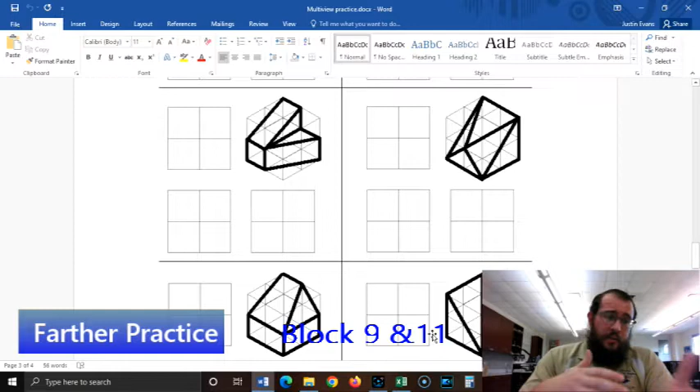Today I'm going to try to do block 9 and block 11. I'm going to do a combination of additive and subtractive for the first one here. So we've got these two triangles back to back like this, or 90 degrees to each other. This one I've been thinking on for a while, but I think I found a shortcut to do it quickly, so let me show you what I'm thinking.

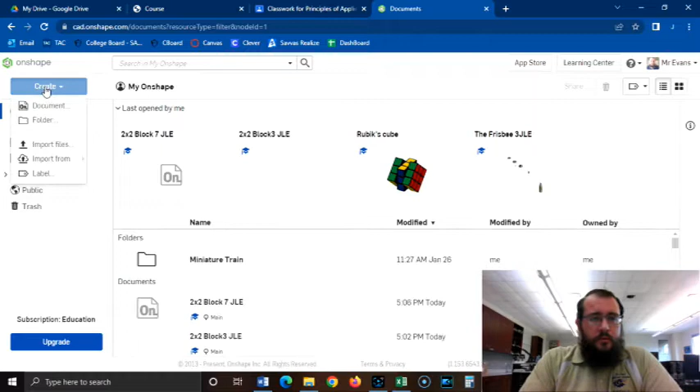Let me switch over to Onshape and start a new part. Actually, I'm going to do these in the same 2 by 2 block: 9 and 12, and then my initials. I'm going to put these all in the same piece, and I'll show you.

So from here, I'm basically going to extrude an L shape, and then I'm going to come back and cut out the triangles. There's a couple of different ways you could approach this. You could extrude a big 2 by 2 block and then start cutting pieces out, but that would take you 1, 2, 3, 4 steps.

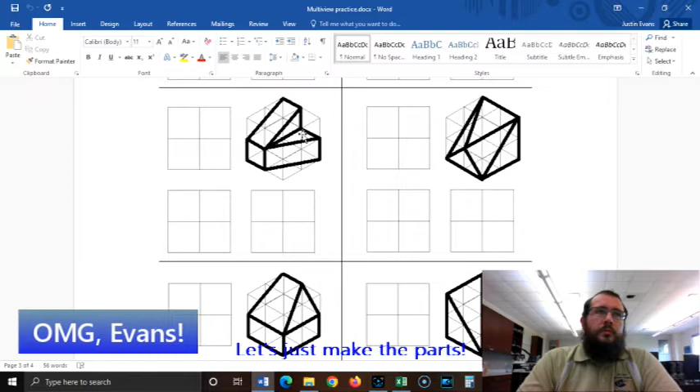I think this might be one of the fastest methods that I'll show you. All right, let's get to it.

So I'm going to click Sketch, and I'm going to sketch from the front view. I'm going to use the line tool now. Before I've been using blocks, so let me use the line tool instead, and I'm just going to make an L shape.

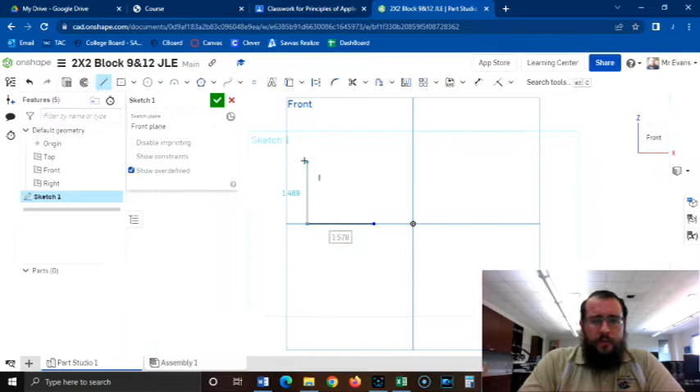And I'm very much ignoring those numbers. I drew that really badly, so let me come and fix some of that. I want to make sure that this is perpendicular, because this looks not straight at all, it looks crooked. So I'm going to make that perpendicular. If yours is, then you don't have to worry about it. Mine wasn't.

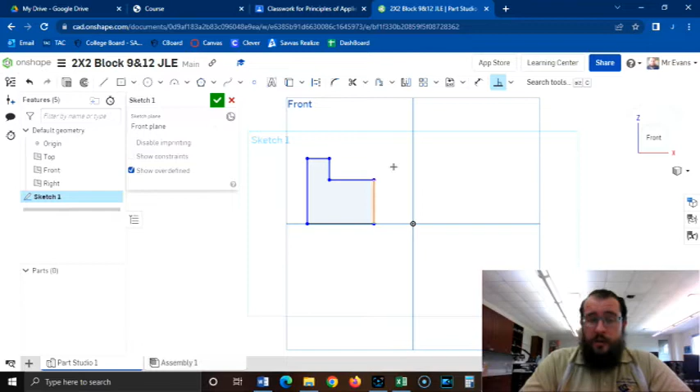Now let me add some dimensions. I want this to be 2 inches, and I think I would like it to be 2 inches from there. I want it to be 2 inches tall, and I want this to be 1 inch tall, and this to be 1 inch.

Now I don't have to dimension every single line. If you notice, they're all black, which means none of them can move. I could add a dimension here, but it's going to tell me it already knew that, and it'll make it gray, because it's saying if this is 2 inches, and I know these are 90 degrees, and that's 1 inch, then this one has to be 1. So it's going to kind of ignore that. When everything's black, that means nothing can be moved around.

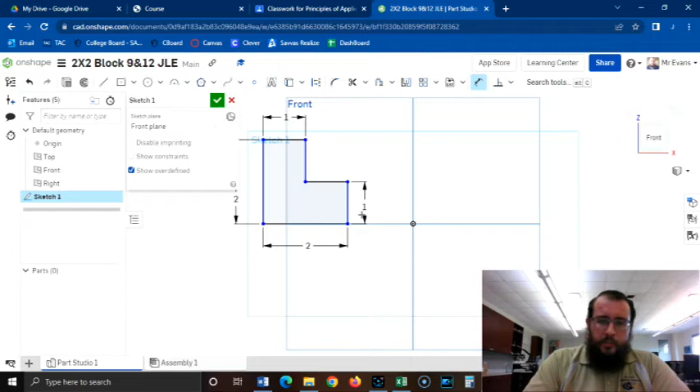It doesn't have to always be black. For instance, if I deleted this, some of them will turn blue because it can still shift around, which is why I put this dimension, just to kind of keep it in place. That dimension is called a location dimension - these others are all sizing dimensions. This one I'm just locating somewhere.

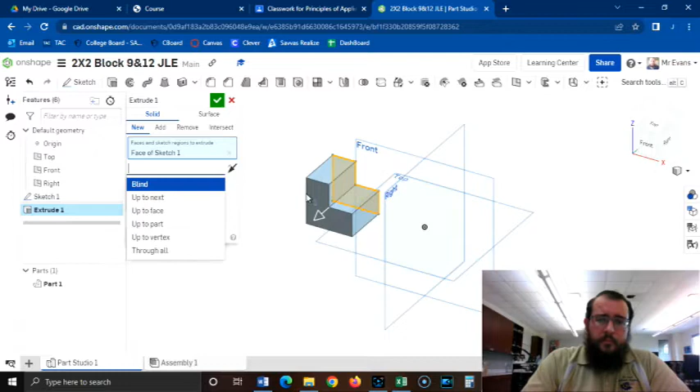So let me hit the green check mark, and we're going to extrude that. Let me show you a new part on the extrude tool. I want it to be 2 inches, but I prefer that my stuff be balanced, so I'm actually going to try and make it symmetric, so it splits 1 inch and 1 inch both ways.

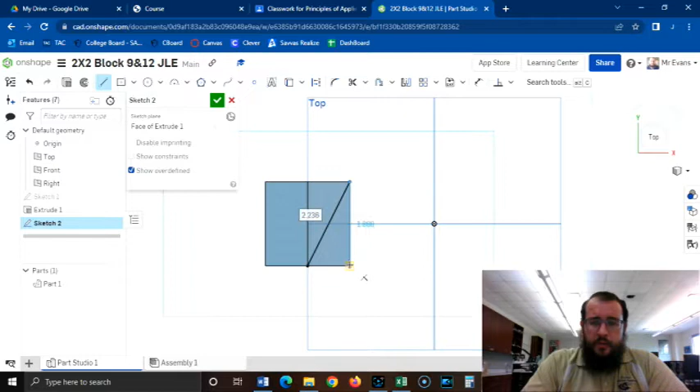All right, so now I've got my basic shape, and then I'm going to come in here and cut 2 triangles. So I'm going to start by putting a sketch on this surface and look at it from the top. I want to cut away this portion here. I don't think I need any dimensions because it's all just corners. Oops, not sketch, sorry - and then I'm going to extrude that. I might need to zoom in.

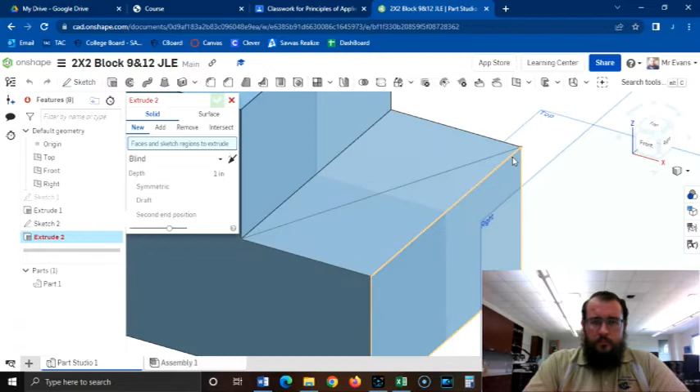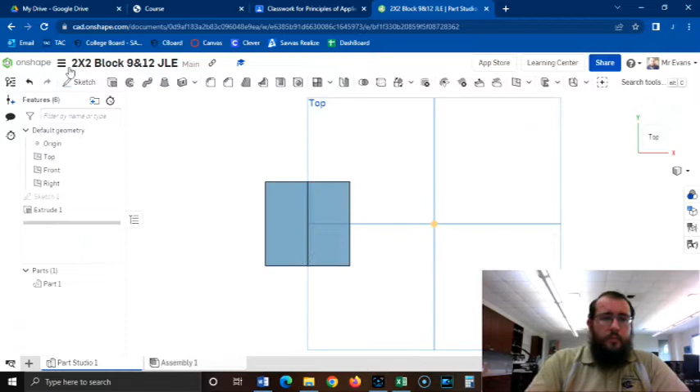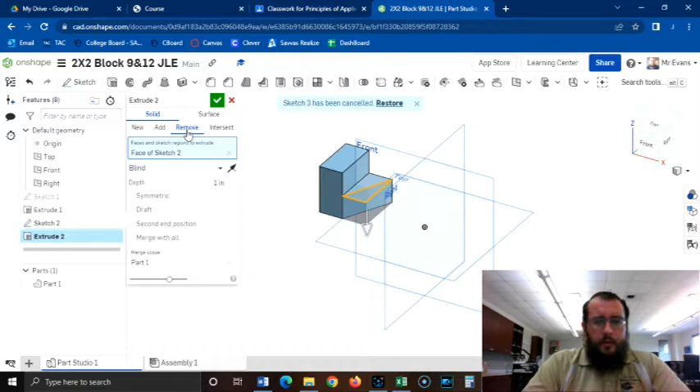Let's see, it's having some problems picking it up. Let me delete the sketch and try one more. Let's just draw the line and see if that helps it recognize. There we go, that helped. I think it got that. No, there we go. All right, I want it to remove. There we go, go down. There we go.

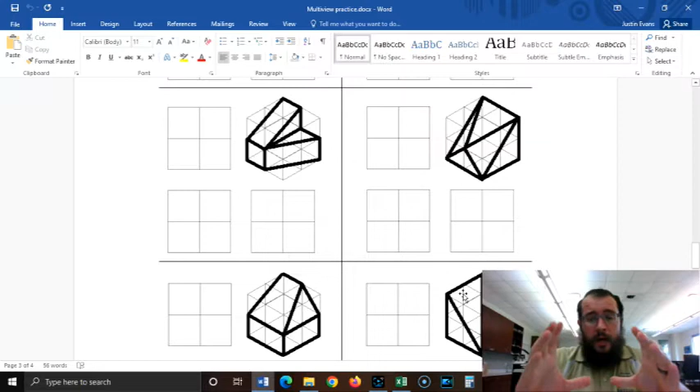Now let's move on to part 12. You could look at this as one big box and then somehow you're gonna have to cut in, and that would be a little bit complicated but not impossible. But we could also see this as just bringing in two triangle prisms with each other.

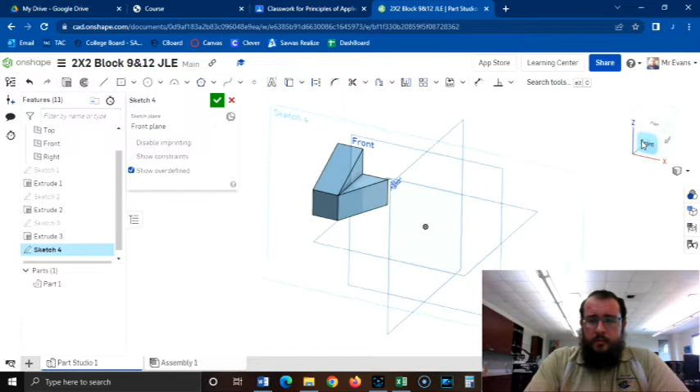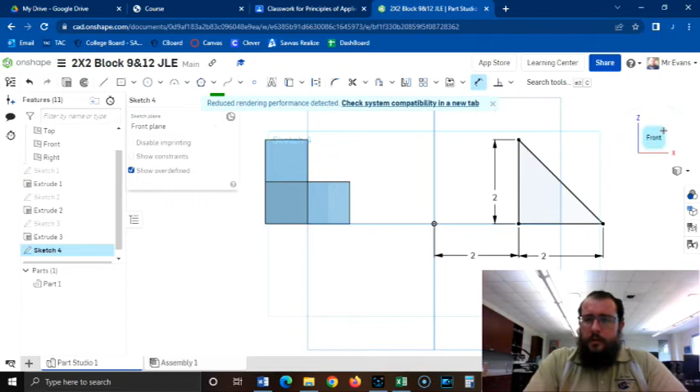So I'm going to put a sketch right here, and I'm going to draw one triangle. And you know what, I wasn't really paying attention to numbers, so I better add them in now. So I want to keep the same 2 inches away and 2 inches by 2 inches. Okay, and then we will extrude that.

And I would like to make it symmetric again, but 2 inches. There we go. And I'm going to hit OK on that. And then I want to send it in this way. But to do that, I think I'm going to have to do a new plane.

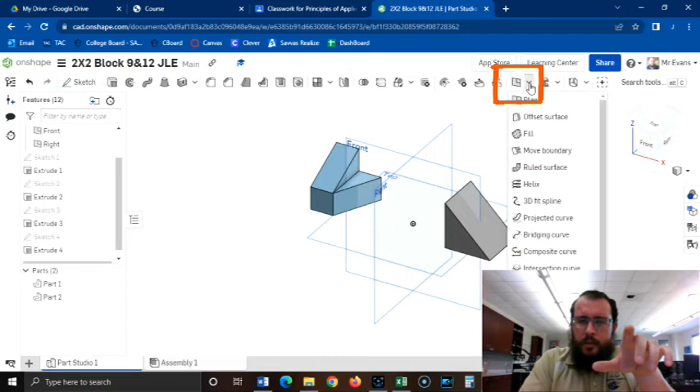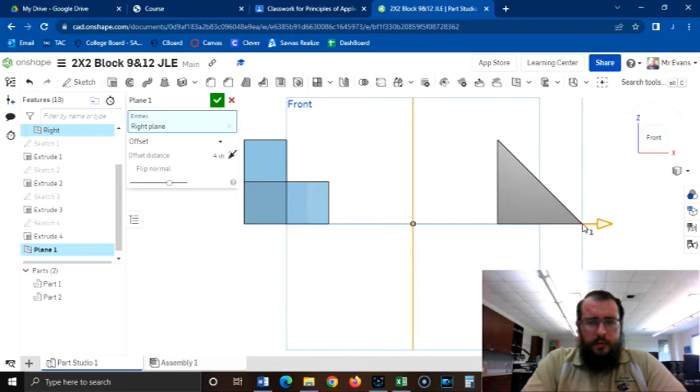So I'm going to click plane, offset. Let's see here, just plane. I'm going to click on this plane. And I want to try and drag it out by doing an offset. Let's see here, it should be offset 4, I guess. 4. I want it to be just right in front of that. And that would only work if in your sketch you made sure to put 2 here, 2 there, so it's exactly 4.

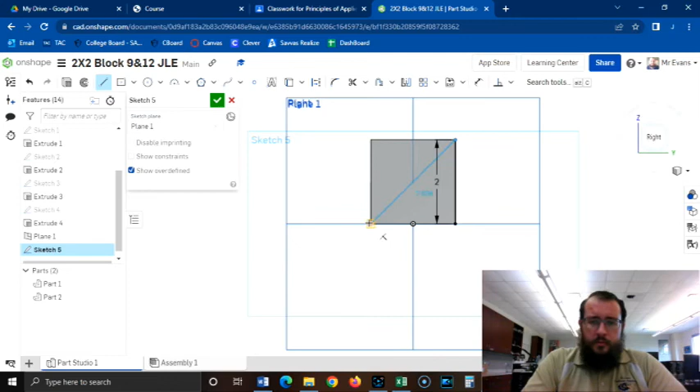All right, so I'm going to create a sketch on this surface. Let me zoom to see it. And then I'm going to draw, I'm going to click a reference point there, and I want it to be 2 units tall. Reference point there, and then back. And now let's just extrude that and let's see if it looks right. If it doesn't, I'm in trouble, I gotta think of something different.

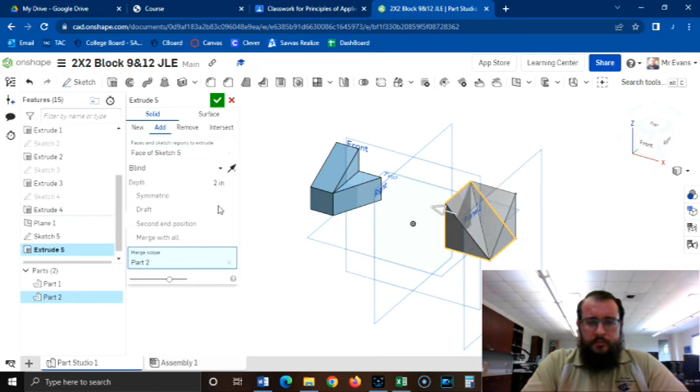So I want it to be add, I need it to go in. Starting to look right already. I need it to be 2. Looks good, here we go.

Now let's get rid of some of that distracting stuff. So I'm going to come over to plane 1 and I'm going to click the eyeball so it's hidden. And I'm going to do the same thing for the stuff up here. Let me kind of hide those. Maybe I'll keep the top plane, but I'll hide the others. Yeah, you can hide the origin too. And now I've got a couple parts here.